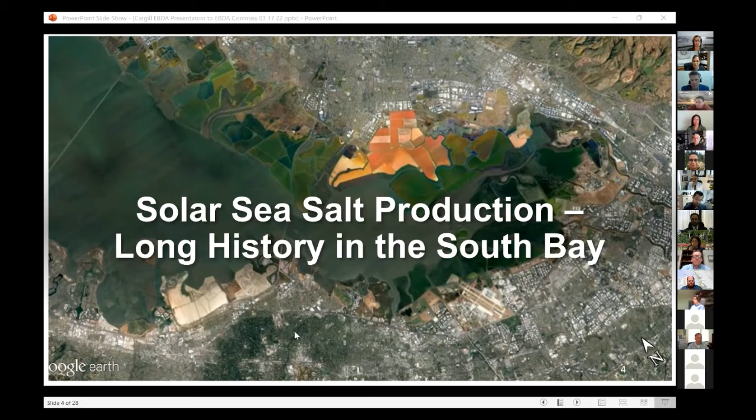This slide provides a very high-level view of our Newark operations. Basically what we do is take in bay water off of what we call the Coyote Slough, also known as the Alameda Creek Flood Control Channel. Seawater quality bay water comes into the ponds, and over time it circulates through the ponds. As Don mentioned, the fundamental purpose here is evaporating water, concentrating up the salt concentration by over tenfold. In fact, most all of the water that comes in is evaporated, and in the process we eventually crystallize out salt.

As Don indicated, our primary product is sodium chloride, by far the most prevalent salt in seawater, but there are other salts in seawater. The brine that comes out of those sodium chloride crystallizers gets further evaporated, other salts crystallize out, and ultimately we produce a very highly concentrated brine of magnesium chloride. Magnesium chloride is not produced as salt crystals, but rather as this concentrated brine. There are several other salts in seawater, and those do not end up in our commercial products.

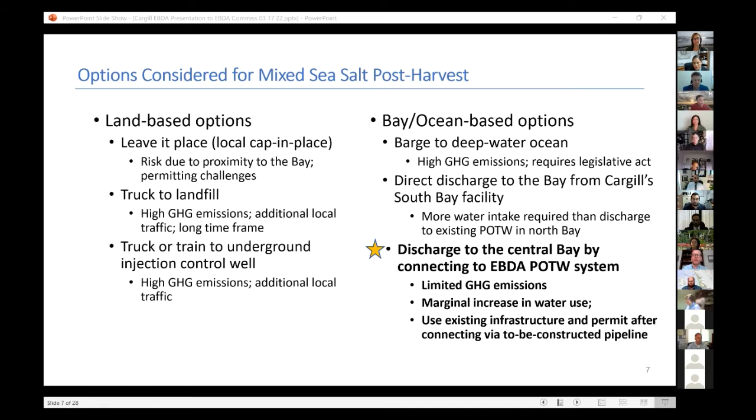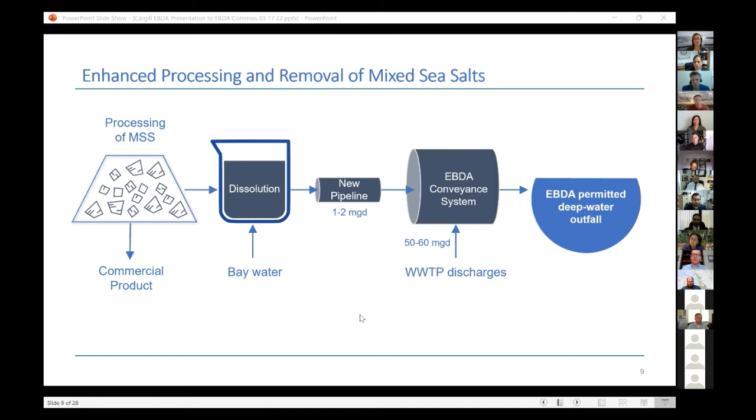So right now, the big challenge we're working through is how do we do that transfer, and in particular, how do we build a pipeline from the Cargill facility to the EBDA system, in order to get it into their effluent, blended in, and allow discharge into the bay.

So the overall proposal is to construct a pipeline. We're working on route options, and we feel like we're narrowing in on that. We've also engaged with local building trades towards developing a project labor agreement for that construction project.

As the previous slide showed, we're looking at pumping anywhere from 1 to 2 million gallons a day of brine discharge. That's a continuous 24-hour-a-day transfer from our facility. At 1 million gallons a day, we should be able to process and remove all of the mixed sea salts over 20 years. At 2 million gallons a day, it'd take about 10 years to complete the process.

Going through due diligence with Jackie and her team, we're narrowing in on just what range of flow rates we want to be operating at, and it's looking like 2 million gallons per day is something that can be easily accommodated, but we're still working on some of those details.

One of the key aspects of this is, whereas we want to pump 24 hours a day, 7 days a week, 365 days a year, we certainly have the capability to discontinue our discharge if and when situations come up where capacity of the system is pushing limits, due to whether it's a particularly heavy rainstorm or any other sort of process upset. We can very easily shut things down until those issues are resolved and then start back up again.

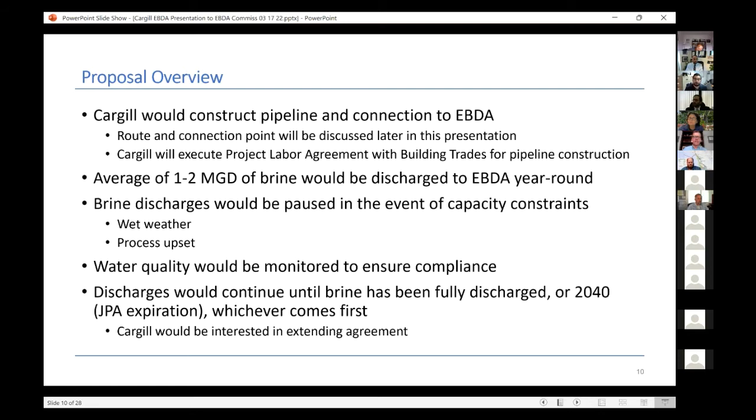Next slide. Okay, so initially when we first got started, the thought was we'll tie into the closest point in the system, just downstream of the Alvarado treatment facility. That would have been fine with respect to compliance with your effluent permit.

But as we dug deeper and looked at what this salinity might potentially do, whether there are risks to the system, it turns out that large sections of that first segment of pipeline are not full of effluent discharge, and there's a large air gap in the top of the pipe. The oxygen in the air combined with the added chloride levels from the salinity, as we engaged with some corrosion experts, would potentially have a significant impact on corrosion of the reinforced concrete pipe.

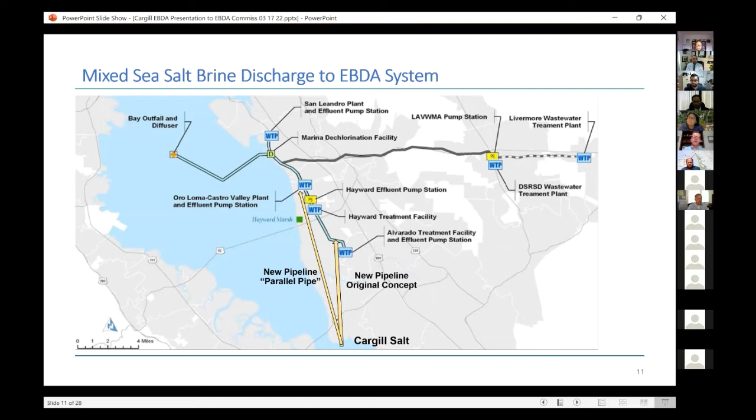So we switched gears and are looking at how to avoid that section of the system where the air gaps exist. We're now working on how to extend the pipeline, basically doubling the length, in order to tie in at or just beyond the Oro Loma facility, because beyond that point in the system, the pipe is fully submerged from there all the way out to the outfall. So the challenge of getting the pipeline across that entire 15-plus miles is currently the process we're working through.

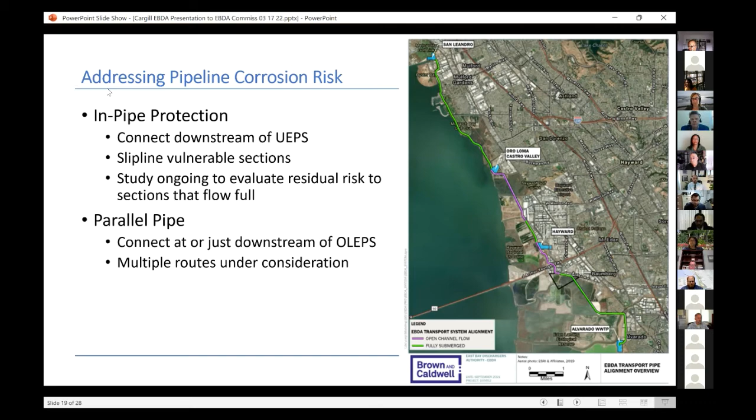Before I get to those routes, which I know you all want to see, I wanted to touch on, if we were unable to find a feasible pipe route and decided to go the slip lining route, this is what slip lining looks like. Basically what you're doing is installing a new plastic pipe within the existing reinforced concrete pipe, which would protect those segments from accelerated corrosion. We've done hydraulic modeling to show there shouldn't be an impact from reduced capacity. Obviously we'd need to discuss that further, but that's the slip lining approach.

The challenge with slip lining is that it's a pretty big disruption to our operations. We'd have to divert the flow for the time we're under construction, bypass it around these segments, and the segments in question go through some environmentally sensitive areas like wetlands. So this would be a challenging project to undertake.

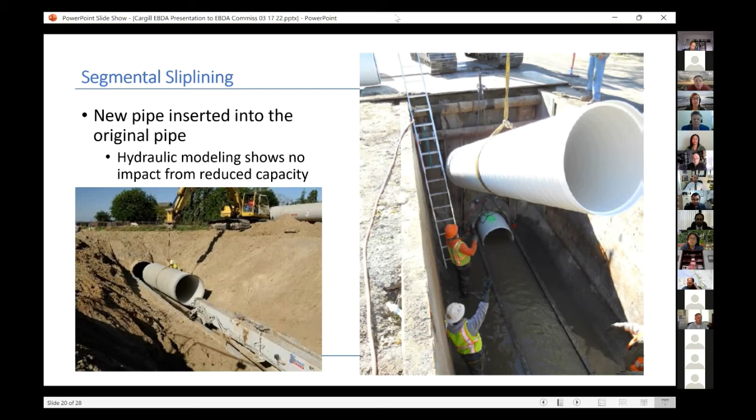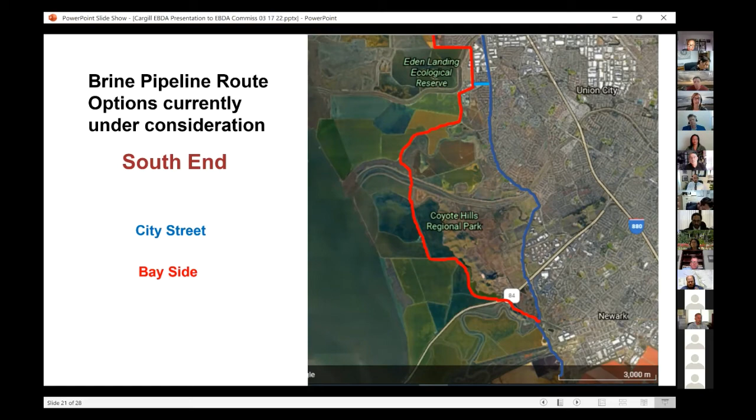So that's the southern end. And then I wanted to get into the northern end a little bit, and I'm sure you all have questions. There's one more slide on routes after this. As you get into the northern part, the newer extended pipeline areas, we've been looking at a city street route, a Bayside route, and a rail route.

The rail route, we don't think it's feasible throughout this length because Union Pacific requires 35 feet of buffer between the center of the rail and the pipeline, and that space just isn't available through this dense area, but it may be in certain segments, and we'll talk about that.

This proposed street route goes down Hesperian to Grant, as we've talked about before, and I'll show an alternative to that on the next slide. And then we have that continued Bayside route, which basically parallels the EBDA force main through the northern sections.

I want to talk about this one other potential alternative, and then I'll pause so we can look at these maps in more detail as you're interested. This is an alternative to the city street route along Hesperian. We heard Hayward's feedback with concerns about the potential disruption of Hesperian, which is a very high quality paving and also a highly trafficked area with neighbors that could be impacted.

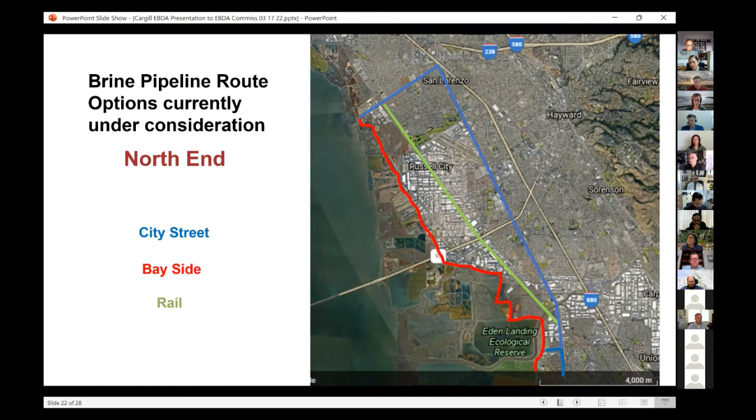So the slip lining option means continuing to have a connection near USD. There's disruption to EBDA during construction and significant bypass pumping, as I mentioned. There's residual risk to EBDA for the unlined sections that we're still working to quantify. And that option still has coordination with Union City on the bike path project, since we still have to build the initial segment of pipeline.

The street route has impact on paving of streets currently in good condition, disruption to traffic during construction, and related impacts on neighbors — I'd put schools and families in that category too. And then we have that coordination with Union City.

With the parallel pipeline through the Bayside route, we have disruption to the Bay Trail, work in environmentally sensitive areas, and long lead time and uncertainty regarding permitting. Another issue I didn't touch on is that the South Bay Salt Ponds is planning significant improvements and construction at Eden Landing. We'd need to coordinate very carefully with them so we don't preclude a window where they've recently done construction and reconfigured the area, and then we come in wanting to build a pipeline. So there's a coordination challenge there we need to work through.